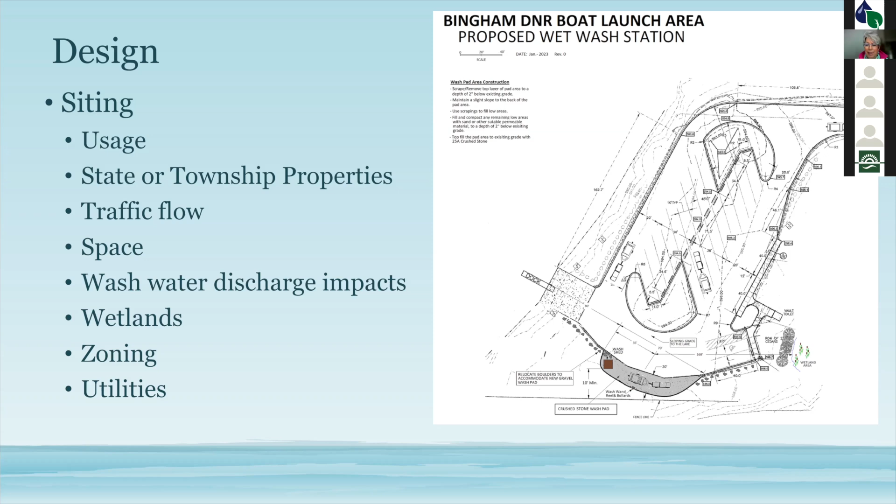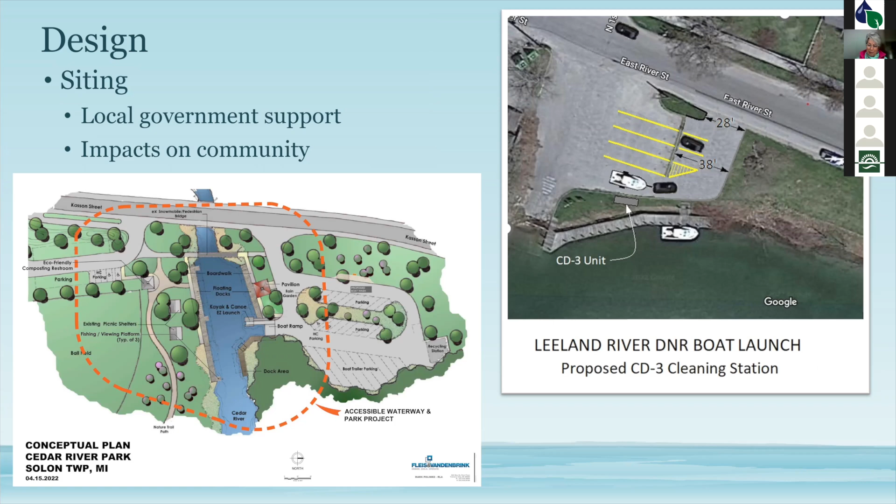design it so that there was good traffic flow was to expand the pavement area and add a new driveway for exit. And by doing that, we were kind of chewing into this beloved township park that's the green area just to the right of the yellow lines. And the Lake Association really just didn't want to be the people that were going to chew into a park. And so this was another project that was abandoned. So there is a lot of stakeholder engagement just to figure out what makes sense for your community.

So these days, there's a couple of technology selections to pick from. You may all have heard of the CD3, which is a high pressure air, wet dry vacuum. We call it a kiosk. It's a self-contained unit. It has really great graphics on it, very visible. It's very educational. And the one that we bought comes with a solar panel.

And so one of the advantages of the CD3 is that you don't need water or electricity. It's easy to maintain. You basically just turn it off at the end of the season. There is a container that collects water that people have sucked out of their live well, and that needs to be emptied at the end of the season.

What is kind of interesting is this simple design actually costs the exact same amount as a high pressure cold water system. So there really isn't a cost savings with the CD3, but it's very, very easy to develop. And we actually moved this. So we had it at one site, and then we really wanted a high pressure wash at that site.

So we got somebody with a forklift and moved it 20 miles up the road. So there's a lot of flexibility with it. The reason that we pursued the high pressure cold water system over more CD3 systems, because this was our first boat wash station, was that we feel like there's a great deal of personal satisfaction in spraying your boat with water versus spraying it with air.

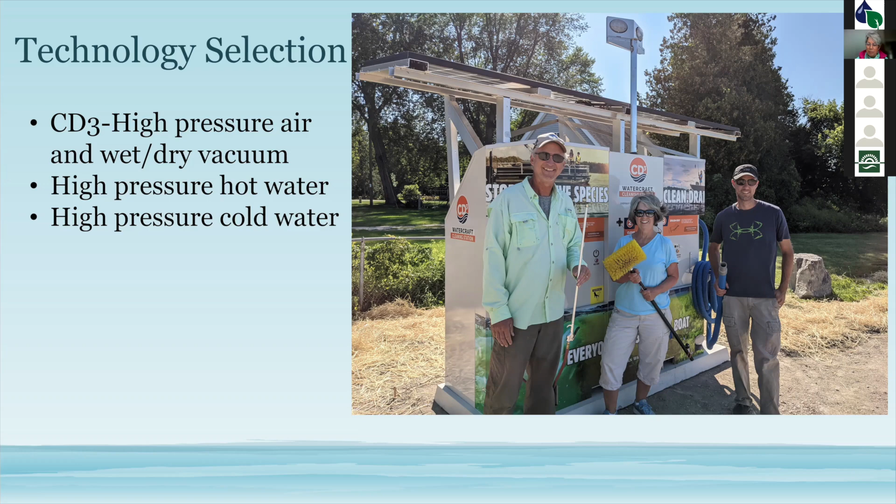Okay, so I'll talk a little bit about the design of the high pressure cold water system. You see, we have a little 8x8 shed. We had that built by the Amish. It's a little sturdier than one that you might get from Lowe's or Home Depot. It's got 3/4 inch plywood and 2x4s. And they delivered it right to our site.

And one advantage of 8x8 is it's typically exempt from a building code permit. So, and everything fits in there with plenty of room. So you can see the inside of the shed. The equipment's not very big. On the very right side, that is the pressure tank that comes from the well. And the well installer puts that in. And then we decided to put in a water filter system.

Whoops, I'm sorry. How do I shrink that? Oh boy.

There we go. We put in this water filter system just because we wanted to make sure that we weren't going to plug the nozzle on the wand. This small piece of equipment right here is actually the high pressure pump. And here's the lid that normally sets on top of it. It's about 20 inches by 28 inches. It's not very big.

And what you don't see here is after this picture was taken, we have an electrical panel and a relay switching panel because we have some interlocks so that the water doesn't run excessively if somebody's fooling around, or we actually turn it off during the night when no one's there, just to prevent anybody from washing their truck or something like that, which is not allowed by our permit.

Then you see we also have a commercial quality retractable hose reel on a post. And of course, that's where the wand is. And this is just a little cover we put on it. And it's one of those things you put around your basement windows to keep the soil out.

As far as utilities, most launch sites do not have electricity or water, and so we had to install both of those things. And then, of course, if you decide to go the hot water method, you would need both a heater and a fuel source.

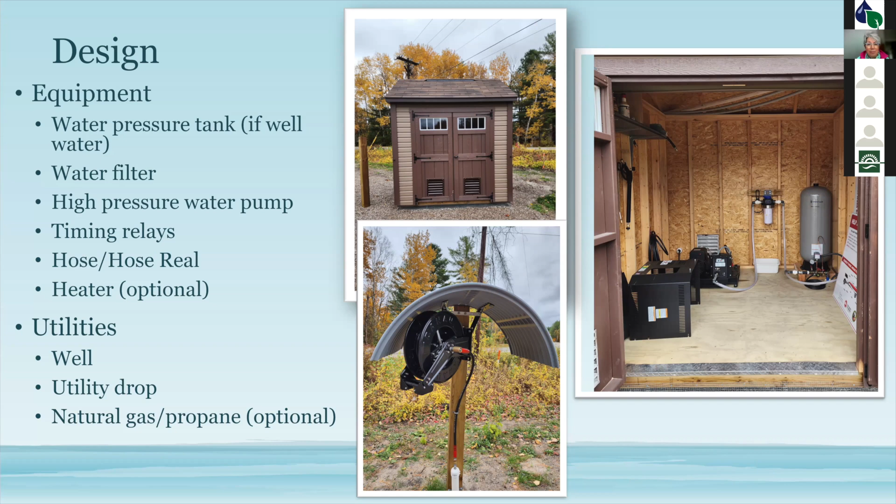Okay, so I failed to mention that my husband and I were like the boat wash power couple. I did the development on getting the stakeholders, the permits, the bids, and my husband oversaw the design and the construction. And so he's very detail oriented, as you see. And this little design drawing has enough information on it that you could print it off and build your own boat wash station. So there's a lot of specifications here. So I think you'll find it very useful.

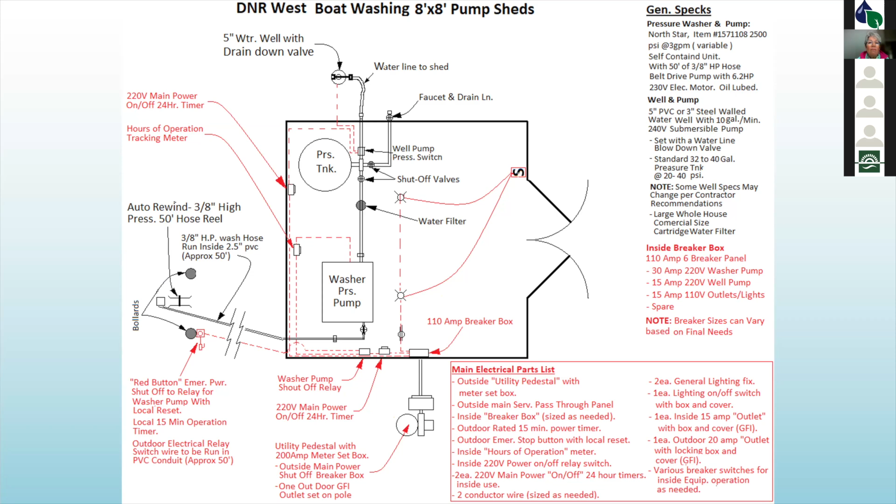Okay, so the list of permits is long, but don't be daunted by that. They're all one-page permits for the most part, not too hard to get. But you have to start with, of course, an agreement with the property owner. And so we have one boat wash station at a township for which we have no written agreement with the township. We're just partnering with them and we keep them apprised of our activities.

And then we do have an agreement with the DNR. It's very detailed. It's 13 pages long. I suspect it's a standard agreement for anybody using state land, is my guess. In it, there are ongoing reports. There's requirements for approvals before you host events on site, things like that. And there are pretty significant requirements for liability insurance to hold the state harmless from anything that could go wrong with the boat wash station.

Another thing that is kind of a surprise is most boat access points do not have an address assigned to them because only buildings have addresses. So it's one of the first things you have to do. It's a one-page county form because you really need the address for all the future permits that you have to get. So second on the list is work with your zoning administrator. Like I said, only one of our 4 units actually needed a zoning permit, so it really depends on what's in your ordinance.

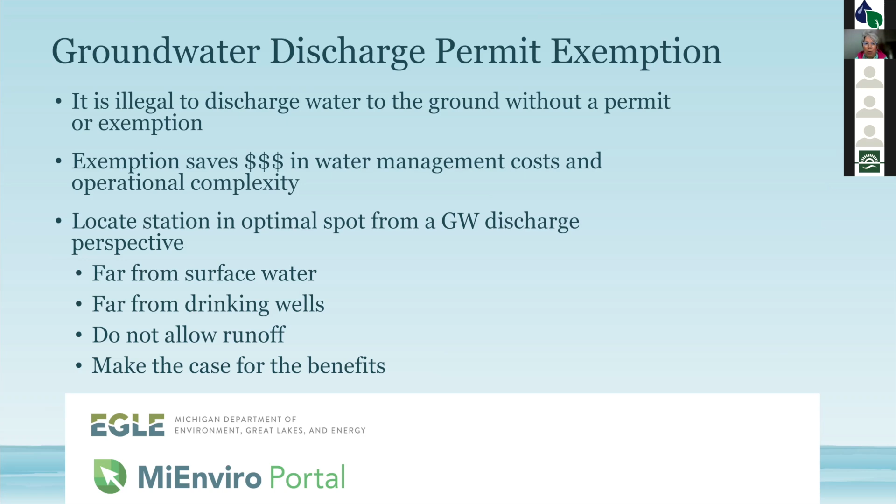And once you get all the permits in place, it doesn't take very long to set the building down, have the pressure tank put in there, have the pump put in there, put in the big posts for the spray wand. It doesn't take that much. I will tell you though, small jobs like this, we waited a long time for the electrician and the excavation. So maybe you have an in with those kind of people.

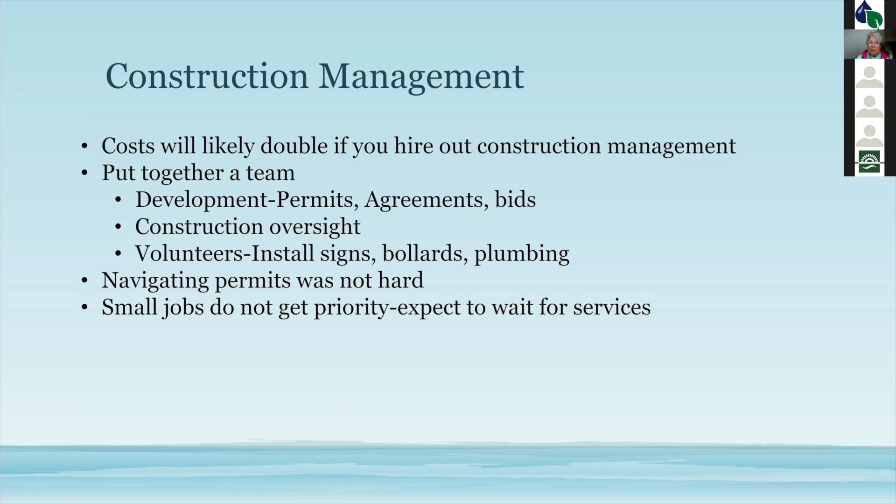So here's the bottom line. All 4 of our boat wash stations came in at right around 38,000. Some of them had a little bit more cost on excavation, some had a little bit more on the well, but pretty much they all came in at the same place. We did not find any grants from the federal, state, or local government. But as I mentioned, we did partner with the Grand Traverse Band, and they actually have contributed substantially to our boat wash station development. I will say that pretty much half of our electrical and a good portion of our excavation, we got discounted rates because of the public benefits we were providing. So make sure you ask.

And as far as ongoing cost, our liability insurance is $3,500 a year. That's for 4 stations. Replacement equipment, so far we really haven't had much. We had damage to the CD3, so we had to repair the solar panels. And believe it or not, we think a boom truck hit it. We don't know how.

Nancy, hi, it's Dave Baker, Long Lake Association. Hi, Dave. Good presentation. Thank you.

My question, do you do any tracking of usage? In other words, do people balk and avoid the site? Can you tell? What's the usage rate? Yeah, darn it. I didn't brief myself on all the stats, but whenever we have a volunteer or an employee at the boat wash station, we track all of our interactions. And I can tell you just kind of anecdotally that 99% of the people that we talk to are very glad that we're there doing it. They're open-minded and that type of thing.

Then we also ask them if they've been in another lake prior or if their boat has been out of the water for more than 2 weeks. And anybody that needs a boat wash, I believe that we have a very high level, somewhere in the 90% level of people that need to have their boat washed have it boat washed. So if the need is there, they're getting their boat washed. But actually, if you want more accurate numbers, I'd be happy to share them with you via email.